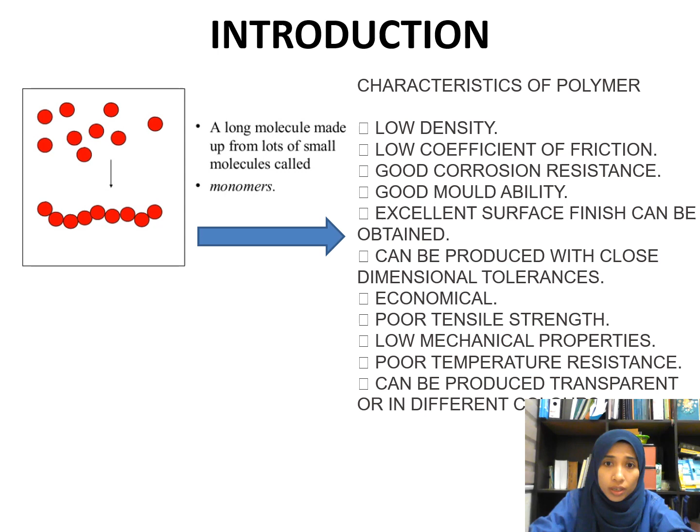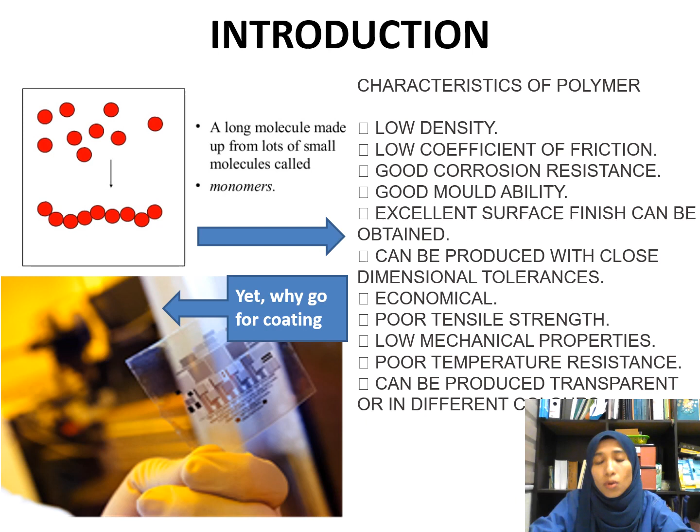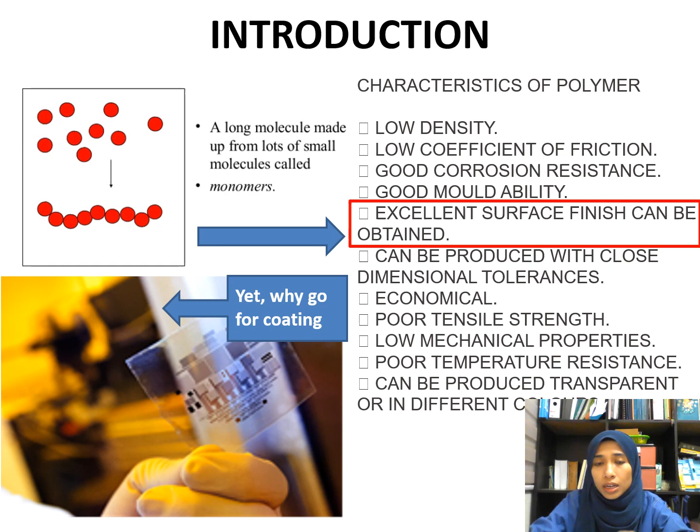For polymer, we know the characteristic of polymer is that it has a long molecule made up from lots of small molecules called monomers. So polymer already has excellent surface finish that can be obtained. Yet, why this study has been done is, even based on all the characteristics of the polymer, it must still undergo a coating process. The reason is we want the surface finish to be even more excellent. That's why we must go for the coating process.

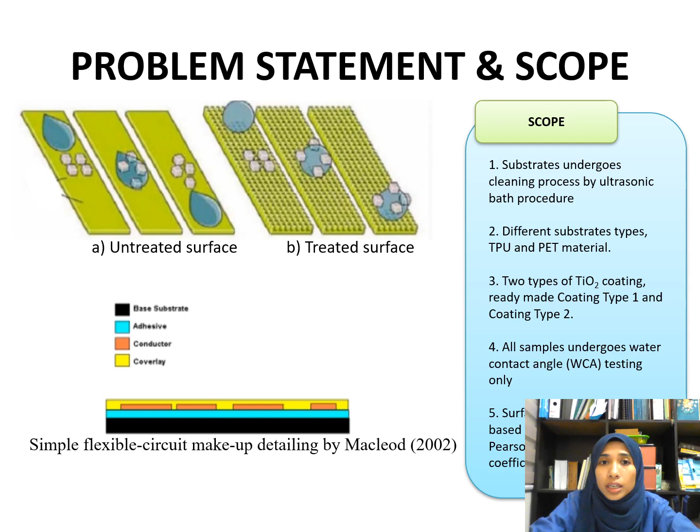From the reading or outcome that we have from the water contact angle, we know how the coating actually gives benefit to the substrate. After that we will see the surface energy outcome. Okay, this is the problem statement and scope of this study.

As I said earlier, the polymers that we want to study in this project are TPU and PET. They are common polymers, but they have additional considerations that we must go through. Based on the properties of the material, we suggest that the material must undergo a coating process in order to get certain properties that we want from the study.

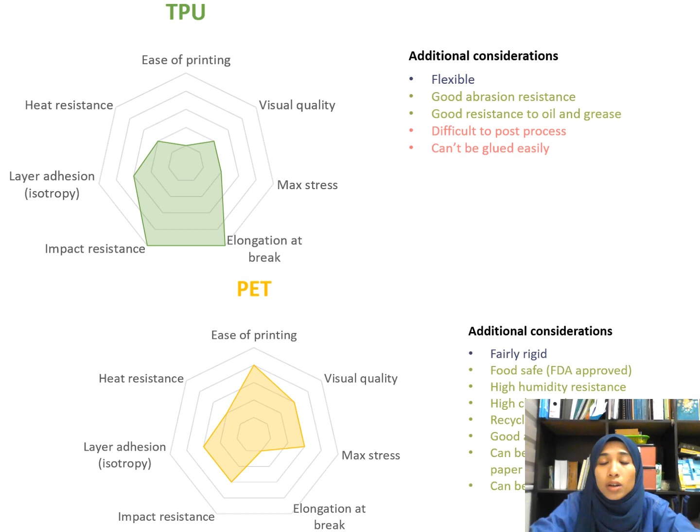So the innovation is that we put a layer of coating on the polymer. The coating itself is titanium dioxide. The benefit we can get from the coating is that it will protect the surface from dirt and moisture.

Earlier I already showed the difference between the untreated substrate and the treated one, where the treated one is just coated with titanium dioxide. The benefit is that it lasts longer even when the substrate is exposed to the weather, so surface cleanliness and quality assurance is really assured. In terms of cost effectiveness, titanium dioxide is more effective than other coatings.

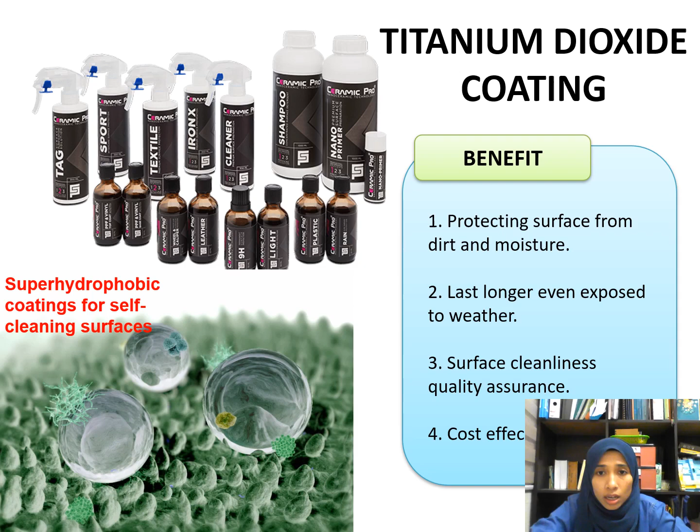So we want to consider that the water contact angle is larger, so that the droplet of water would not be absorbed by the substrate. Besides that, it would clean the surface of the substrate by carrying out the dirt or any moisture on the surface itself.

What are the important terms for this study? Actually, we want to study the contact angle. After we coat the substrate, we want to see the contact angle of the sample, and then we want to know the wettability outcome for the surface. We also want to study the energy resistance outcome for the substrate.

So for this project, after we coated the substrate with titanium dioxide, we want to see whether the coating would help the substrate, the polymer, increase the contact angle of the water.

And then, by studying the contact angle, it is a common way to measure the wettability of a surface. Wettability is actually the ability of any solid surface to be wetted when in contact with a liquid.

As for this study and recent studies, for the polymer, we want to make sure that the polymer has low wettability. Why do we want low wettability? So that the surface of the polymer would not easily absorb any moisture or water on its surface.

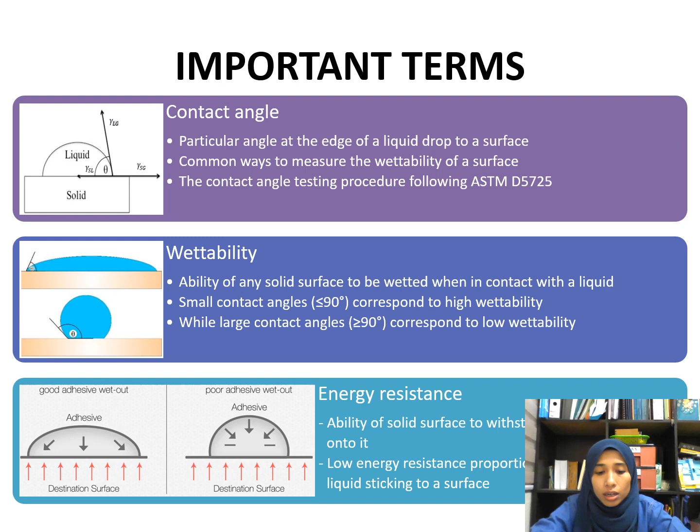Then because of the printing process, we don't want the surface to be wet. So from this study, we want to make sure that by coating the substrate, we ensure it would not easily absorb any moisture on top of it.

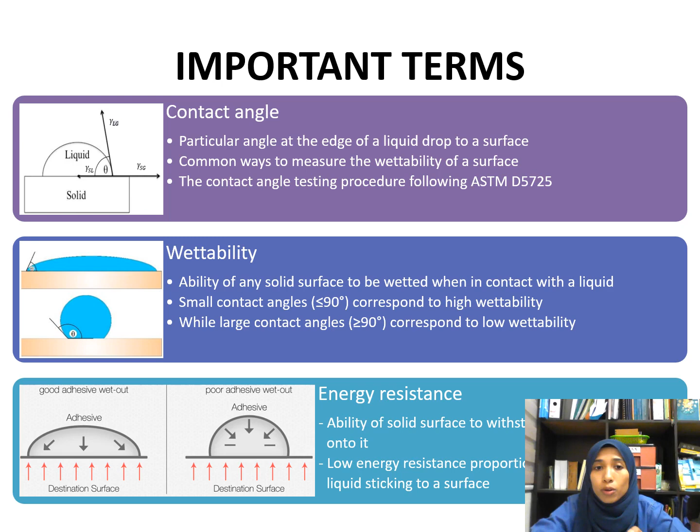The research objective of this project is to investigate the effect of titanium dioxide coating on polymer, especially thermoplastic polyurethane, regarding its contact angle.

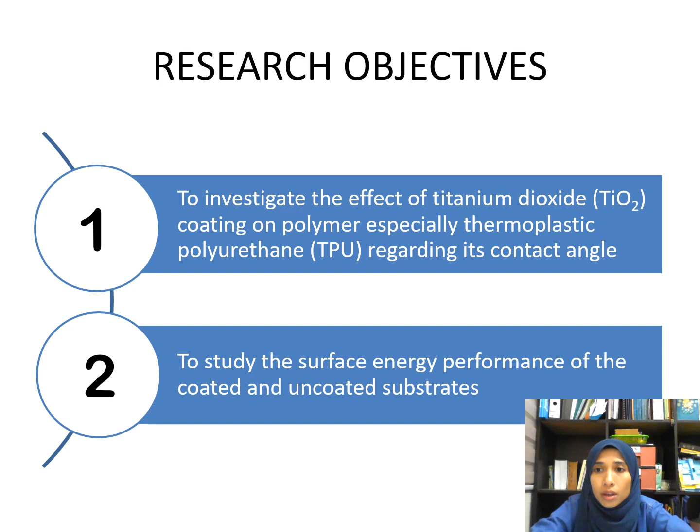Then we want to study the surface energy performance of the coated and uncoated substrate. So in doing the study, we have done some review on previous studies.

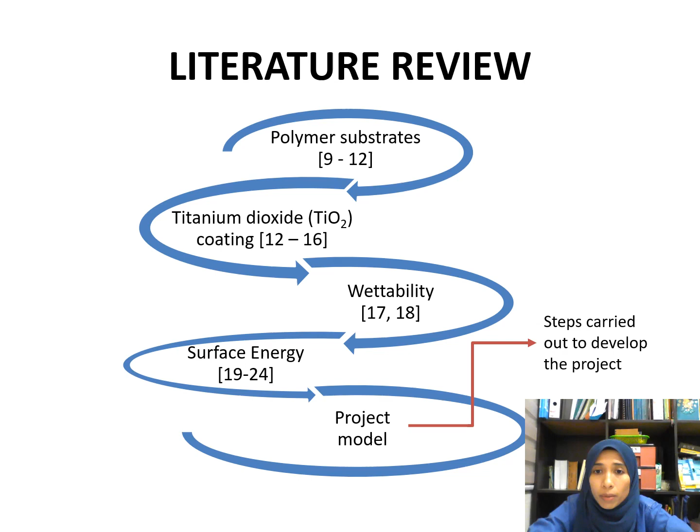So we studied the polymer substrate, the outcome of titanium dioxide coating, the wettability, and also the surface energy. Then from the literature review, we came up with our project model together with the steps to carry out to develop the project.

Then from the literature review, the research scope is like this. From the previous study about the variety of polymers, we want to focus on surface analysis, the contact angle testing, and coating types.

So we came up with our own study for TPU and also PET.

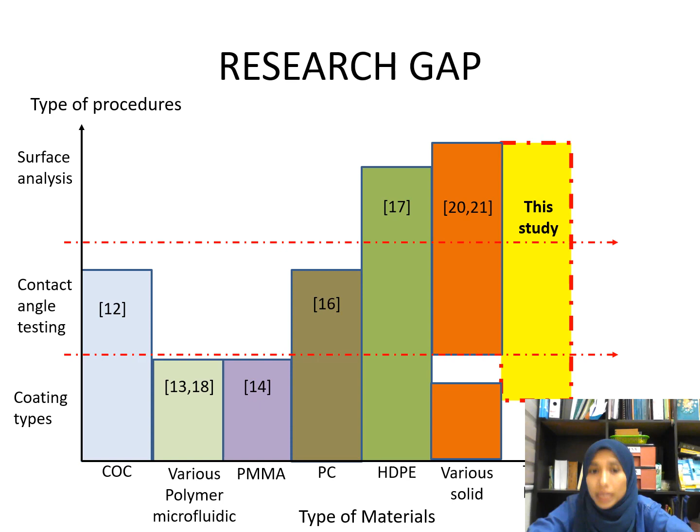The methodology that we used for this project is: first we started with sample preparation for TPU and PET materials with appropriate parameters, and then we coated the sample with two types of titanium dioxide for comparison purposes.

And then for the wettability scope, we find the water contact angle of the sample surface. So we got the reading - we tried to get the reading of the water contact angle of the sample surface.

Then the last step, we came up with the method. We tried to find the best method of calculating or finding the surface energy performance of both TPU and PET.

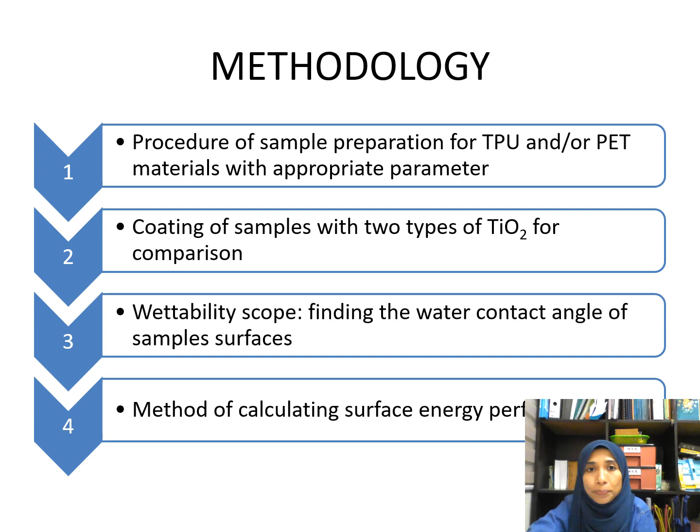This is actually the process of sample preparation. We started by cleaning the substrates using an ultrasonic bath procedure, then we dried the substrate, and lastly we coated the substrate with titanium dioxide.

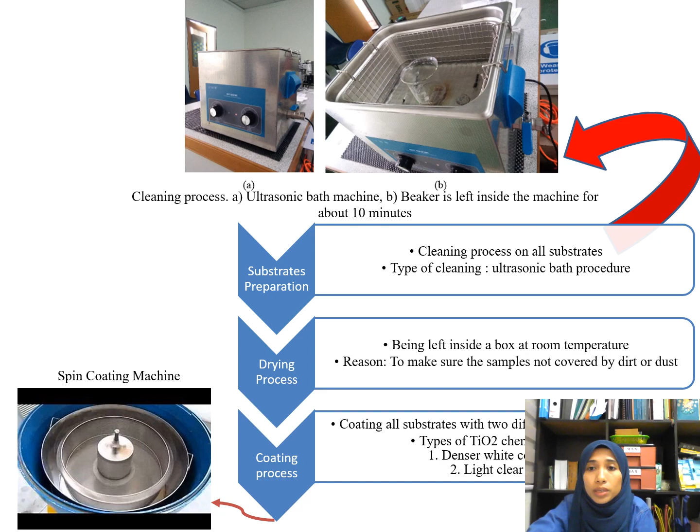And then this is actually the apparatus to get the value of the water contact angle of the substrate. So the substrate, we cut it as a sample with 20 millimeters wide and 60 millimeters long.

Then we divided the substrate into six, and then for 6 different areas, we would drop water on these 6 areas, and then use the WCA measurement tools.

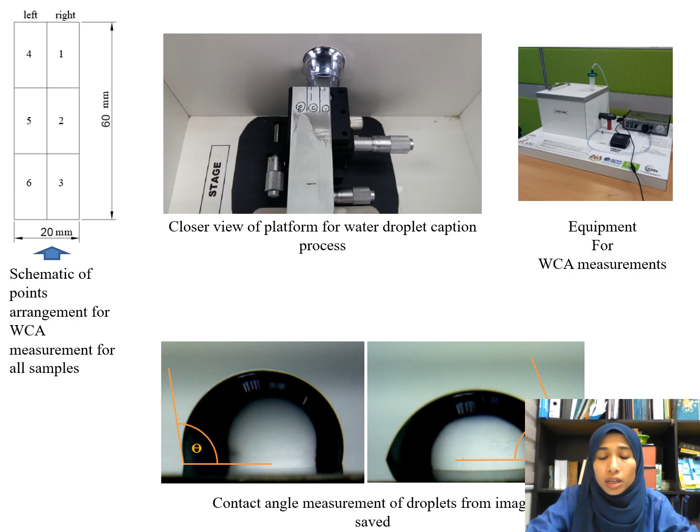By using the WCA measurement tools, we capture the water droplet, and then we measure the contact angle by drawing the exact angle reading, and from that we get the value of the water contact angle.

So this is actually how we get the water contact angle - we make sure that the surface is straight like this one, and then we just adjoin the line so that we get the value of the angle.

And then after we get the value of the water contact angle, by using this study's surface energy equation, we use the standard graph or standard outcome of surface energy performance to get the value based on the water contact angle value we have before.

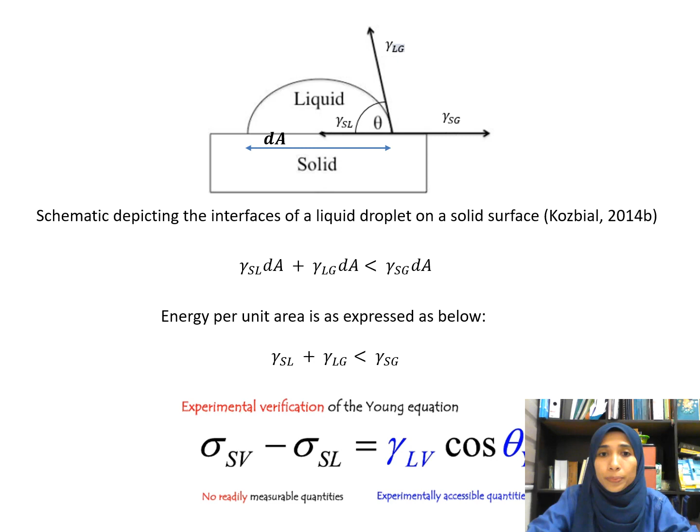As for surface energy analysis, after doing the experiment - which is after getting the value of water contact angle - then from the value of the water angle, we get the regression line of contact angle with the surface energy analysis.

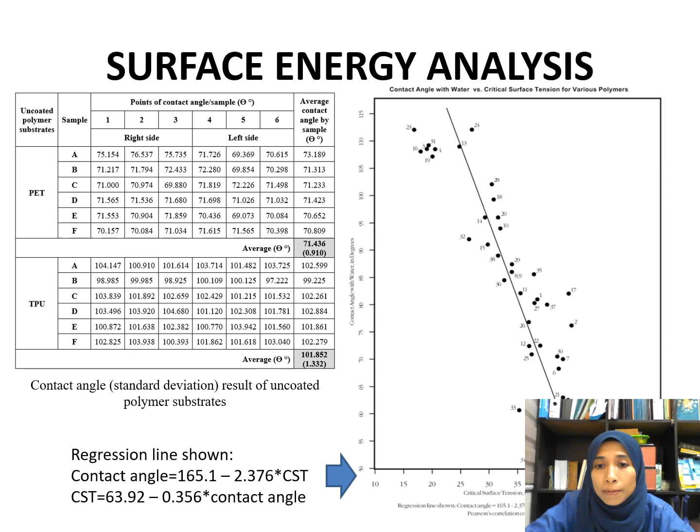So we will adjoin from the average contact angle by sample. Sample A, B, C, D, E, F represents different parameters of substrate, and we do the droplet of water to get the water contact angle. From the average value of water contact angle, we adjoin it to the regression line, then drop down to the x-axis. From here, we can get the surface energy value.

This is the outcome of the water contact angle. Sample A is for uncoated polymer. Sample B is uncoated polymer also, but a different type. We have PET and also TPU.

Sample C is the coated polymer with coating process 1, and we also have coating process 2. So the outcome is here.

You may see that the water contact angle for uncoated polymer is lower than the coated one, for coated type 1. For type 2, the uncoated polymer value of contact angle is larger than the coated one.

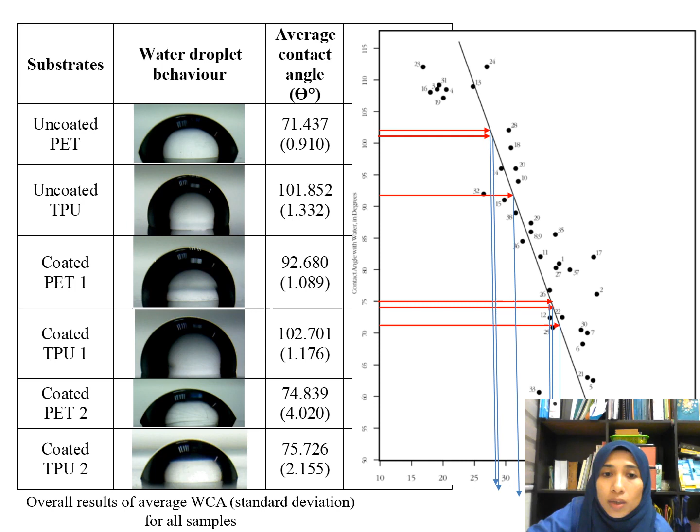So as I said earlier, the value of average contact angle is adjoined to the regression line, then we drop it down to the x-axis, so we can get the value of surface energy analysis.

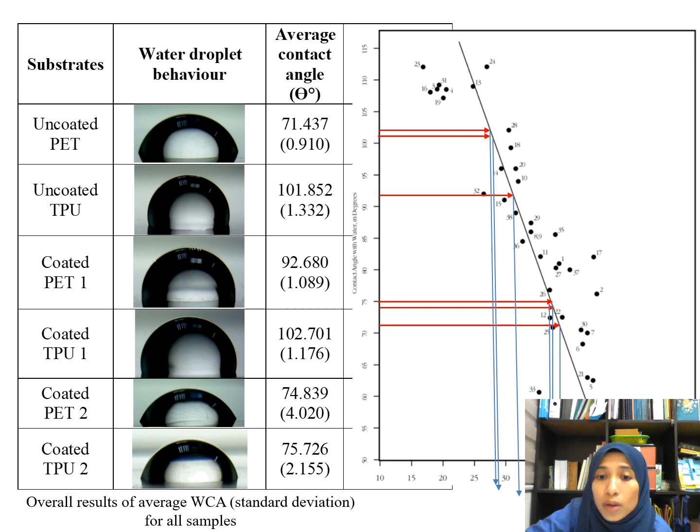This is the result and discussion for this research. By innovating the substrate, by coating it with titanium dioxide, we may see that the coating process improves the value of average contact angle and also the value of surface energy analysis.

For this analysis, we want the surface energy to be lower, so we know that the adhesion between moisture and the substrate is not that strong, because we want that once the water droplet is on top of the substrate, it would easily disperse by sliding through the substrate.

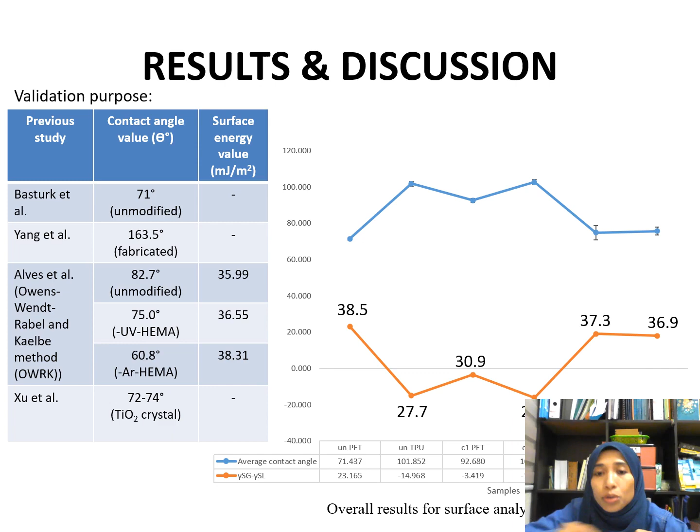As for the conclusion of this study, it can be concluded that polymer coating using titanium dioxide did improve the low energy resistance of the substrate.

Titanium dioxide coating on polymer did increase the average water contact angle values of the materials, especially on thermoplastic polyurethane. Yet, it would differ for different density of titanium coating.

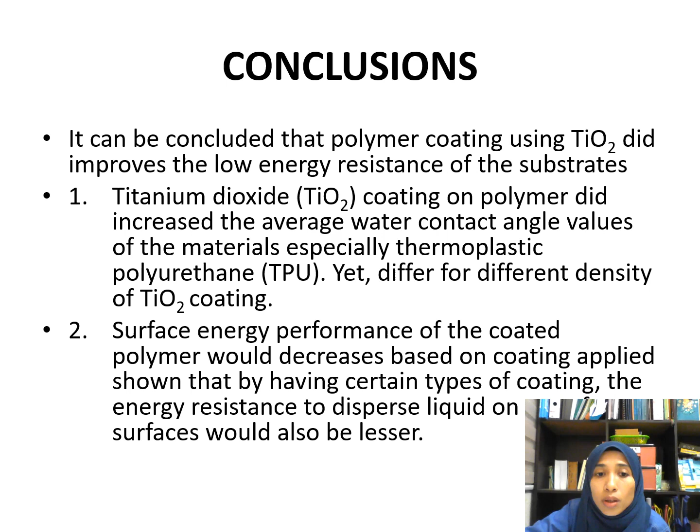Surface energy performance of the coated polymer would decrease based on coating applied, showing that by having certain types of coating, the energy resistance to disperse liquid on top of the surface will also be lesser.

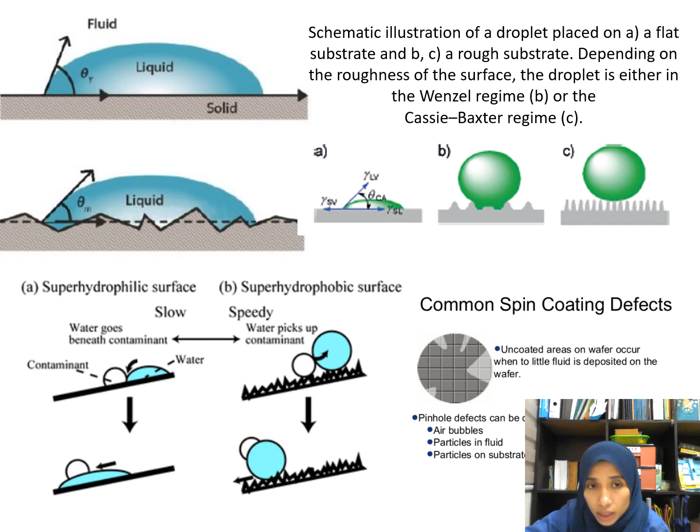This is actually the easier understanding by looking at the image, so we know how we consider that the substrate have high water contact angle and also low energy resistance.

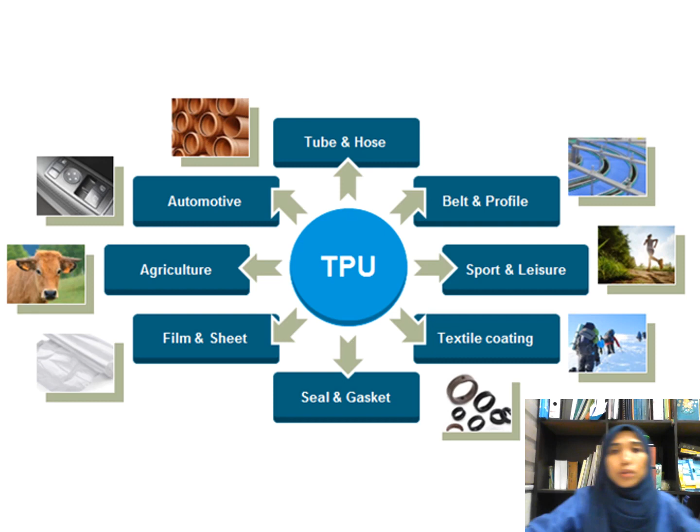Thus, from this study, we know that polymer is already known and being used in various industries. So by coating it with titanium dioxide, it will improve the properties of the material.

After doing the research, there are some recommendations that I would like to raise for all. It is good to study the best density or layers that give the best cover of the substrate.

It is suggested to study a different approach to evaluate the surface energy performance, whereas for this project we just focus on linear regression of the surface energy analysis.

I would also suggest others to study and develop a complete flexible circuit with deposited conductive ink on the substrate. Then apply coating as a cover layer of the circuit in order to get the real effect of titanium dioxide coating on the circuit.